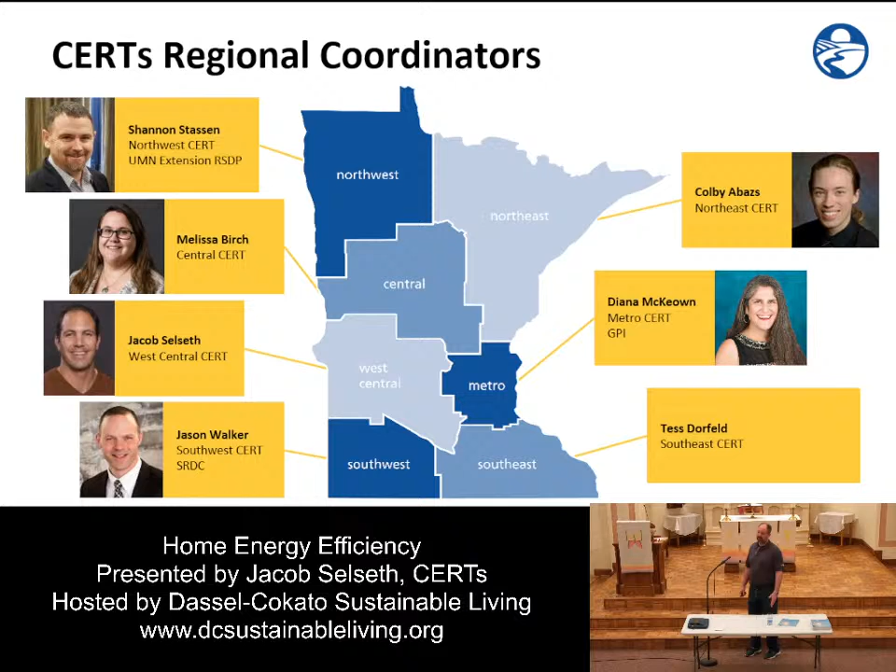All right, so that's enough about CERTs. Any questions about that? Probably not. So now we're going to dig in, get to know your home energy use. Next slide. So we're going to do a little trivia.

I did like this just to set the table. How much energy consumption takes place in homes in Minnesota? So the total energy used in Minnesota, how much do you think is used in homes versus schools and businesses and agriculture? Do you think it's 1/10, a fifth, or 3/4?

All right, next slide. Ding, ding, ding. Yeah, so what that kind of means is, as a collective, that's 20% energy use in the state of Minnesota. You as an individual can save on your own bill and whatnot, and as we can collectively save, there is a lot of opportunity for energy savings residentially. Next slide.

And this is what it looks like. So this is typical energy use in a home, 800 kilowatt hours per month. Back in the 90s when I was starting, it was kind of 7, 8 cents per kilowatt hour. Now we're like 12, 14 cents a kilowatt hour, which if you think, we are, 25, almost 30 years later, so there is, from an inflation perspective, energy is still pretty cheap. But so you're kind of looking at a little over $100 bill for the typical single family residential home.

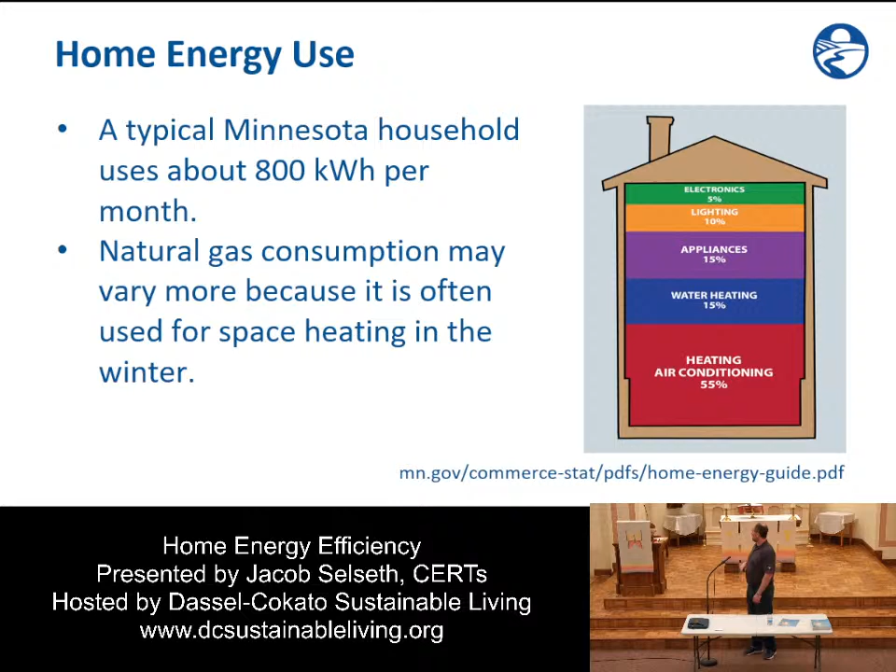The IRA, which just sounds funny to me all the time because I think of other things, but it's the Inflation Reduction Act. That was implemented in the last couple of years, and it's actually being rolled out as we speak. We've all experienced quite a bit of inflation in energy bills, grocery bills, pretty much everything. So this act that's been implemented is really going to help us quite a bit if you want to take advantage of some resources coming available.

So it consists of tax credits. You'll see up ahead here, there'll be some rebates. There's a lot to do with something called electrification and changing our habits of how we use energy.

There's a maximum annual cap of $3,200 a year. What's kind of cool is that a lot of the energy credits out there now are lifetime caps, but this is a $3,200 annual cap, and it's a 10-year program. So depending on how you utilize it, you can stagger your needs. There's up to a 30% tax credit to help you pay for an energy audit, a great place to start so you understand what you might need to do.

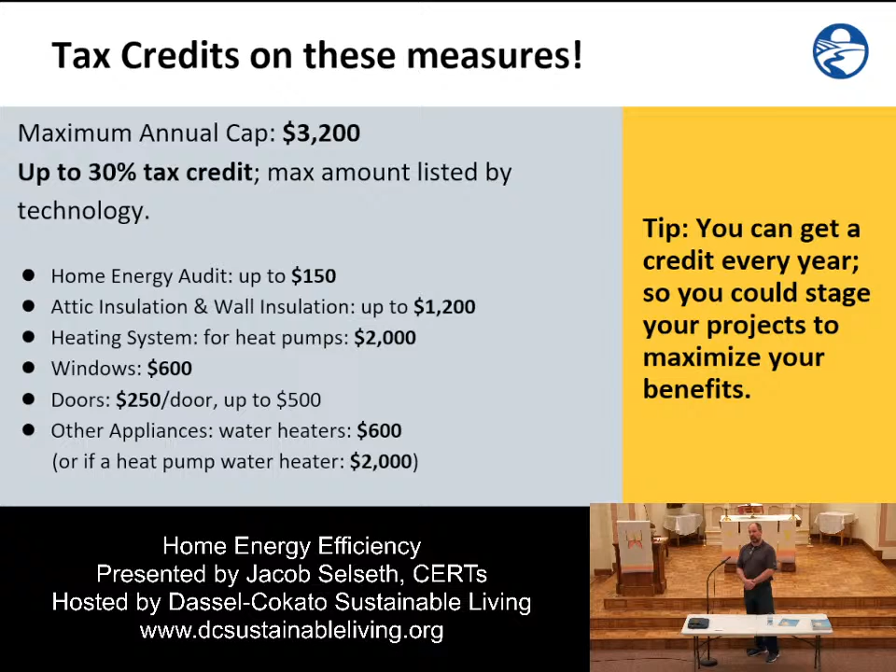Next slide. What is a heat pump water heater? Okay, first let me tell you what a heat pump is. A heat pump — your refrigerator is a heat pump. Your air conditioner is a heat pump. A dehumidifier is actually a heat pump too, but just set up a little differently.

It's the refrigeration cycle. Your air conditioner doesn't make your air cold — it removes heat from your house and rejects it outside. So you've got that little A coil sitting on top of your furnace, assuming you have a forced air furnace, maybe central air conditioning, which is fairly predominant. That coil absorbs heat from your home with the air flowing past it. The refrigeration cycle absorbs that at a quite high rate, and then rejects it outside at that central unit, those larger units you see outside your home.

A heat pump is the exact same system, except it has a reversing valve and is set up where it can change directions. Your air conditioner, your refrigerator, your car's AC can only go in one direction. A heat pump can go in reverse. So it's pretty cool — we talk a lot about air source heat pumps, which are just like your central air conditioner. That big unit is absorbing heat literally down to, and they can run down to 0 degrees, very effectively down to 10 to 15, with incredibly high efficiencies doing that.

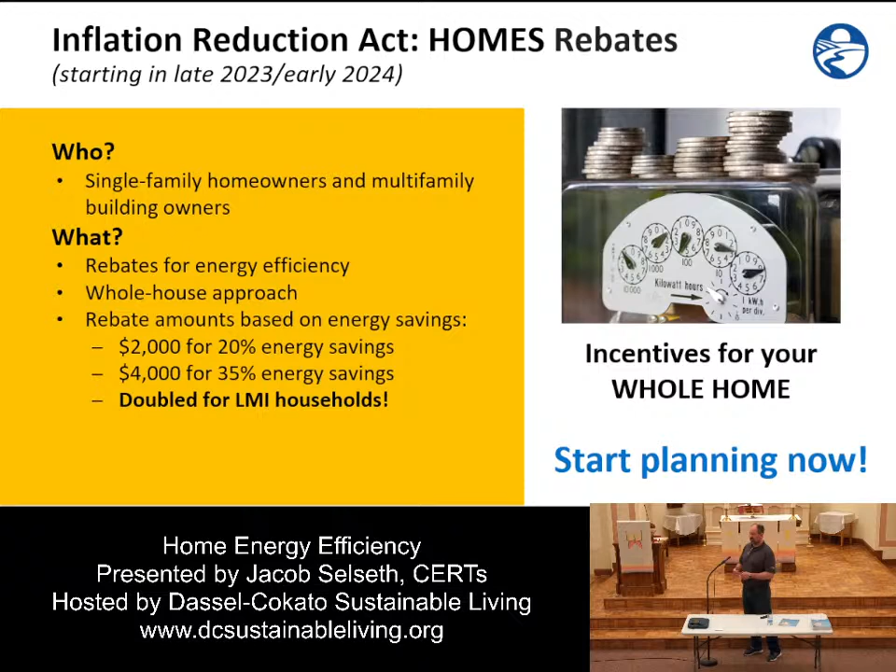So this is kind of nice where they're actually putting it into a rebate form. So if you are of lower income or moderate income, have a family, it's all those kind of things we'll have to figure out. I don't have the details on that. I don't even think the government has it perfect yet. But yeah, it's going to come in rebate form too, so that's kind of nice. And we'll know more as we go.

What's the timing for this? It's basically, it should be now, but that's kind of the way things go. They make the legislation and then they tell people to go figure out how to implement it, and that's kind of where we're at. I actually kicked myself a little - I did a lot of energy work last year knowing this was coming, but I had my own reasons for doing it.

That electric load service upgrade, for people that want to start charging in their garage for an EV, heat pump type things, solar, all those kinds of things - I think you can get up to like $14,000, so I'm just kind of like, wow.

When the housing crashed in '07, '08, they had a Recovery Act then, and a lot of that money went towards utilities and the smart grid. That's kind of like two-way metering. All the wind turbines we see now, a lot of that came because it was heavily incentivized to push, basically, some government money to push that market that way.

Now, when I was at Moorhead Public Service, we figured the energy coming out of that wind turbine was about 16 to 18 cents per kilowatt hour, and Moorhead Public Service's rate was 8 cents a kilowatt hour. Those large wind turbines you see out there now, the average cost coming out of there is 2.2 cents per kilowatt hour. It's cheaper than nuclear, cheaper than coal, cheaper than everything.

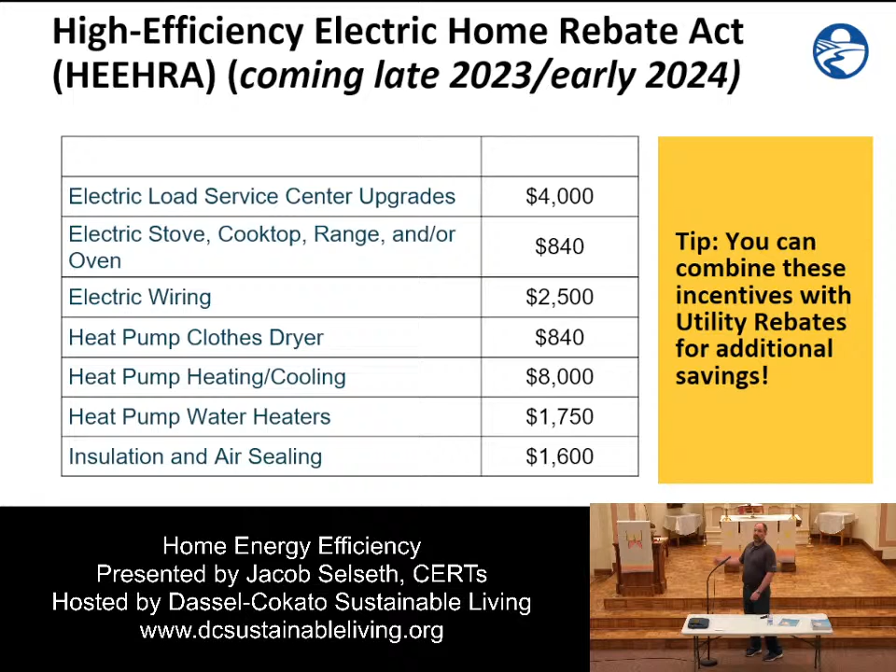So when it's windy for these couple of days, does it store up extra energy because it's extra windy now? Yeah, so I mean, there is kind of that.

It probably has changed. I don't know specifically, but the turbines have gotten so big. It was 150 kW that we did at Moorhead. Then they did a bunch of 225s. Then they went to 1 megawatt, which is 1,000 kilowatts. So it's a lot. Now they're up to 2.5, 3.

I would be safe to say, once you go over 35 miles an hour, some of the turbines start to turn out of the wind. They're like, oh, it's too windy, too gusty. So you do run into, too windy is not good, but they run pretty darn well, and they've done a cool job of gearing them differently now, so you notice they rotate seemingly a little slower. They're gigantic, so they calculate it based on the tip speed of the propeller, the blade.

Storage, essentially? Your question was, if it's windy today, do we have energy from that for tomorrow type of deal? So that would be energy storage, essentially? Yeah, so I didn't take it in that direction, but energy storage is definitely a big piece of the pie right now.

One thing I think is a little bit overlooked is the simple fact that as we diversify those resources, we've got wind now going in South Dakota. We got wind, and this is pretty recent. South Dakota is very recent. North Dakota was just like 10 years ago, and Minnesota was kind of the 15 to 20 mark. So if it's windy here, windy there, there's a marketplace out there that helps dictate where energy goes through something called nodes.

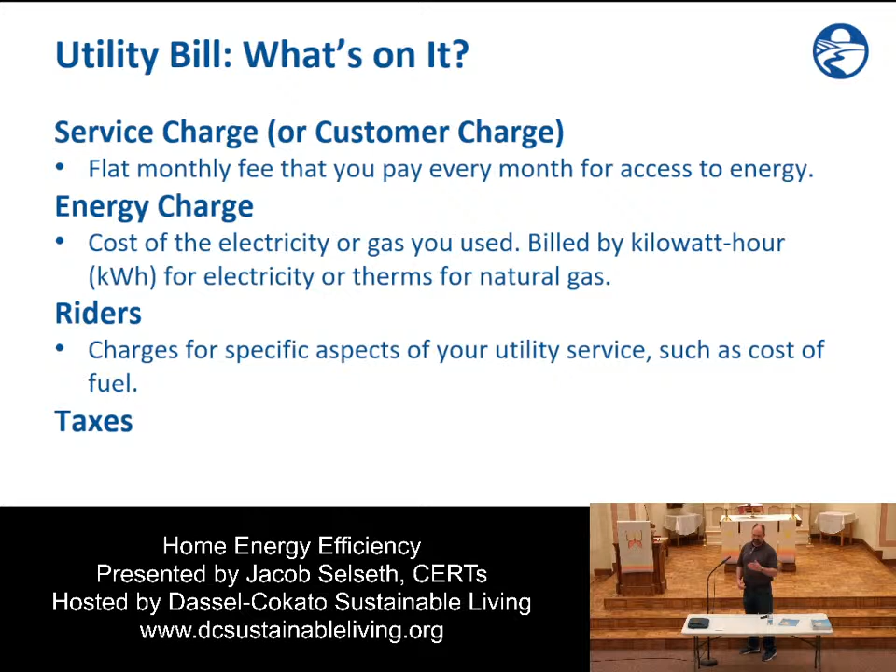And then there's riders. So you'll have like a 12-cent, maybe go next slide too, actually, on this one.

Yeah, there's way too much detail on there. It's too far away, but there's a lot of riders. Like you see this a lot on the gas bill - the natural gas bill has a transportation fee, an environmental fee, there's this fee. So once you add them all up, you could have like 50-cent gas, but really it's 85 cents once it's all done.

And that has been a big one. So during COVID, natural gas was like at 50 cents a therm - that's 100,000 BTUs, I know, whatever - but that's what they were charging, and now we're over $1. So that was a doubling. And there was a time earlier in my career that it went like $1.10 or something like that, but that was kind of an aberration.

So it'll be interesting to see how things shake out. But energy prices are up. Electric is actually kind of nice - it is up, but where gas can go up and down literally on a month-to-month basis, electric sometimes they'll have winter and summer rates, but generally the increases are much more like 2%. Sometimes you hear a little bit more like 5%, but it's much more kind of a stable environment, generally regulated by the Public Utilities Commission.

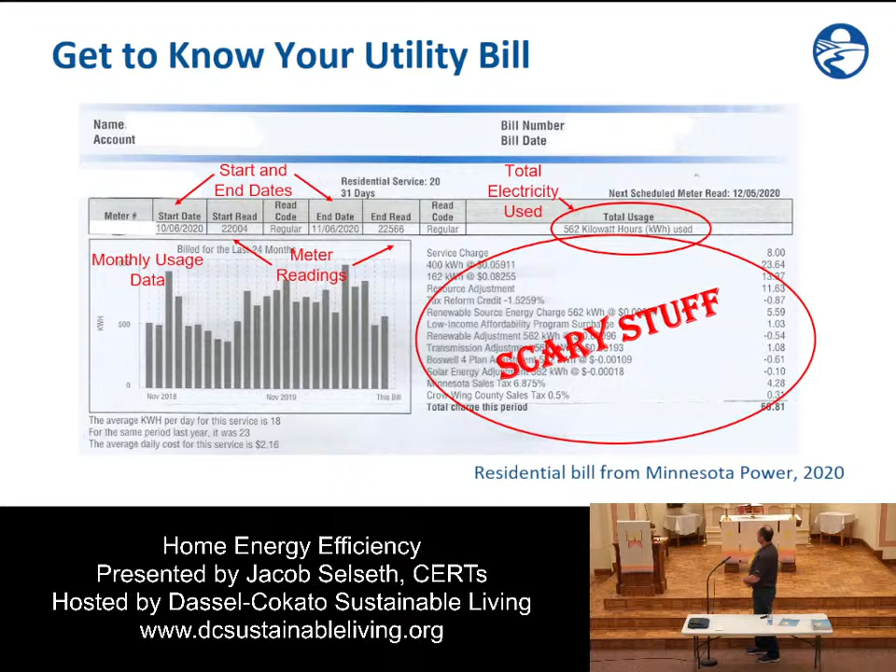Okay, yep, so a kW is the power - that's that 1,000-watt space heater. 1,000 watts, that's how much power you have. You run it for an hour, that's a kilowatt hour, 1,000 watts over 1 hour. That's the 15 cents. So when I started out, I bought a house, rented, put a guy in the basement. He thought it was cold, plugged in the space heater, and that thing just ran and ran and ran. It was like $80 a month. So time - and I'm going to show this, hopefully it's coming up pretty quick - is a huge piece.

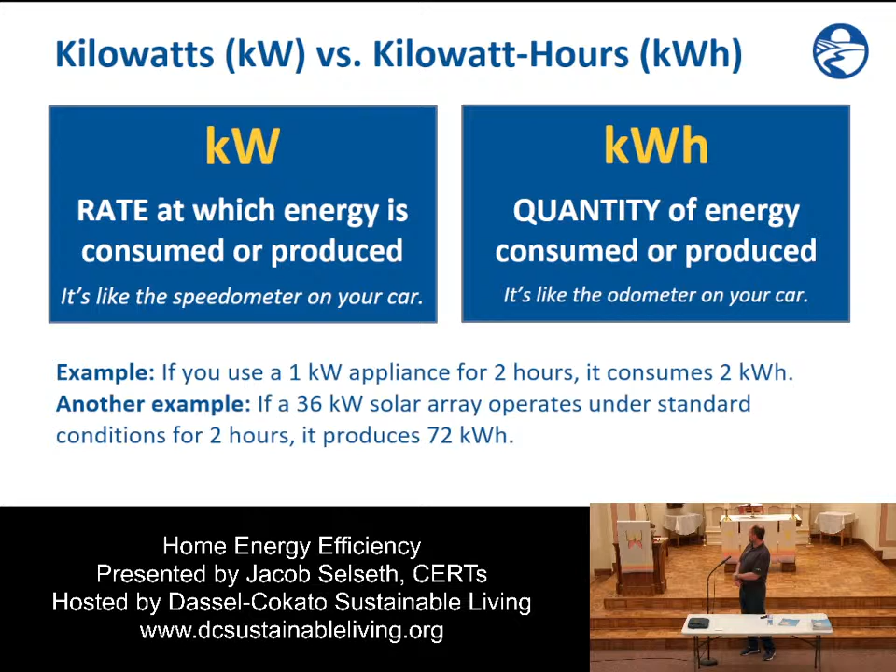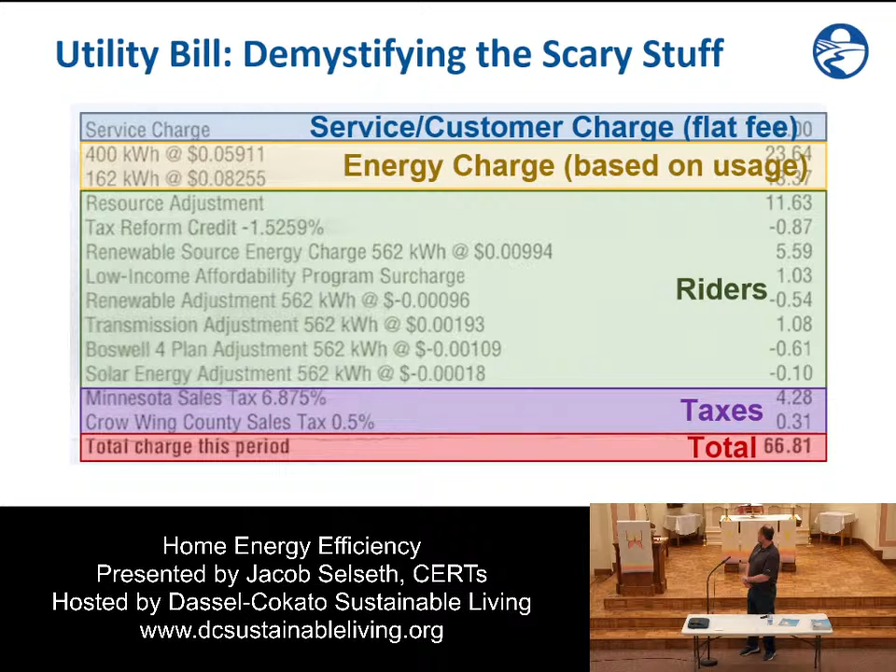My time piece is coming up. So this is kind of nice - almost all the electric utilities now have like a My Meter type program, or they can have a lot of different names for it, like everything these days. But essentially, I mentioned something earlier called smart grid. Meters used to always be just one-way, so it would count your electricity, and a meter person would come along and read that meter, and then they would charge it, and that was it. Then they started to be able to send that number over the wire - sometimes they could do that. Well now meters can talk two ways - they're two-way communication. And to be honest, we have not really done a lot with that.

There's kind of cool things that can be done, but that's still down the pike. But one thing that has been done is you can pretty much go online at the vast majority of utilities. There's probably a few that don't have it, but most do - co-ops, IOUs, I'm not totally sure. Munis that have it, but it's hard to say. There's a lot of utilities in Minnesota.

But you can kind of see these spikes. And if you've taken a lot of high energy bill calls, especially early in the career, you're like, what the heck happened there? Christmas lights used to be a big driver, believe it or not - not so much anymore. The LEDs actually make a big difference - LEDs are huge energy savers. But you see the air conditioning bump there in the middle.

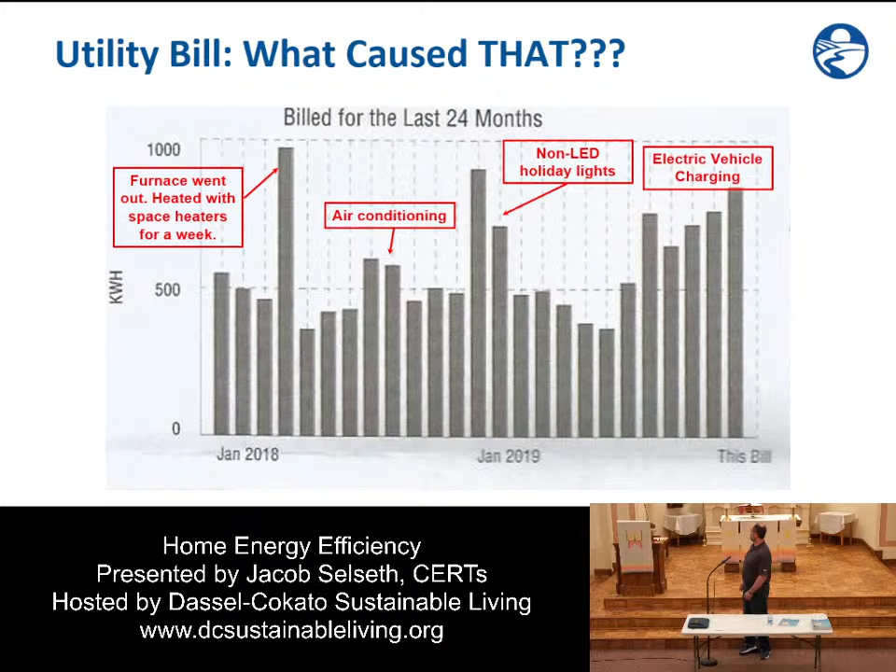For those of you that don't know, yesterday was the final day for the cold weather rule. So May 1st, the cold weather rule ended. That's for folks that have a hard time paying for their utilities—the state of Minnesota won't allow utilities to shut off people's heat in the wintertime, and that's a good thing. But the bills do come due, so on May 1st that program ends.

EAP—you guys know what that stands for? Energy Assistance Program. Let's go to the next slide.

Basically, like I said, cold weather ended yesterday. If you know somebody in that position, the next slide has resources. Right in Wright County, we're kind of right on the edge—in Wright and Meeker.

Wright County Community Action serves a little bit wider area, but they can help you with your bills. Wright County is right here, and then United Cap is over in Meeker and a little bit beyond. Those are people that can help you with a lot of things—energy audits, helping with bill pay, all kinds of things. They're really great organizations, and we work with them a lot. Any questions about that?

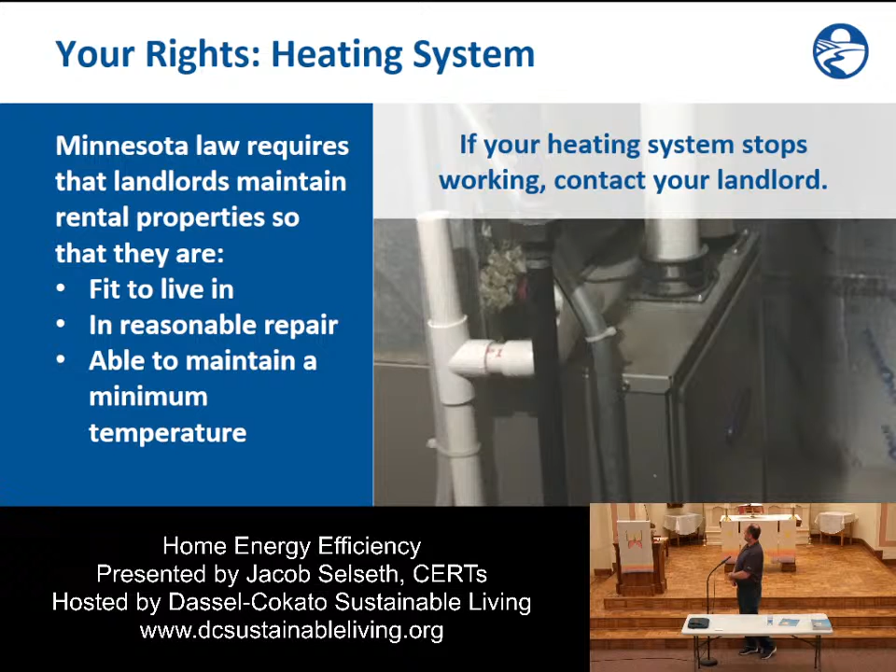Next slide. So check your utilities—they've always got the best rebates, things of that nature.

All right, so now we'll get really into the weeds. Hopefully you guys have some specific questions about your own home, but I'm going to show you a little bit about my house.

I love putting this up here because however you save energy, whether it's gas or electric—this is a little more electric-focused as a representation—you can reduce your power, like getting a refrigerator with a lower kW amount that operates more efficiently, or you can reduce your time, and that's a big one. If you have things running a lot, look there first to try to reduce the time through motion sensors, time clocks, or just simply turning off the lights.

And that's all it is, kilowatt hours—kW times hours is kilowatt hours. Does anybody know what the 8,760 number is? That's how many hours there are in a year. So that is a giant multiplier.

People leave stuff on and it just kind of adds up and adds up. You can talk about a 60-watt light bulb, but if you're leaving things on... big thing, dehumidifiers in the basement, those old brown ones—anybody remember those old black and brown dehumidifiers? Those things just run and run, and people call in and ask why their bill is so high. You go through this checklist and realize you never think of that. So try to find those things you never think of—maybe it's insulation, a hole in the insulation, a leaky window or whatever, that's just a sieve hour after hour.

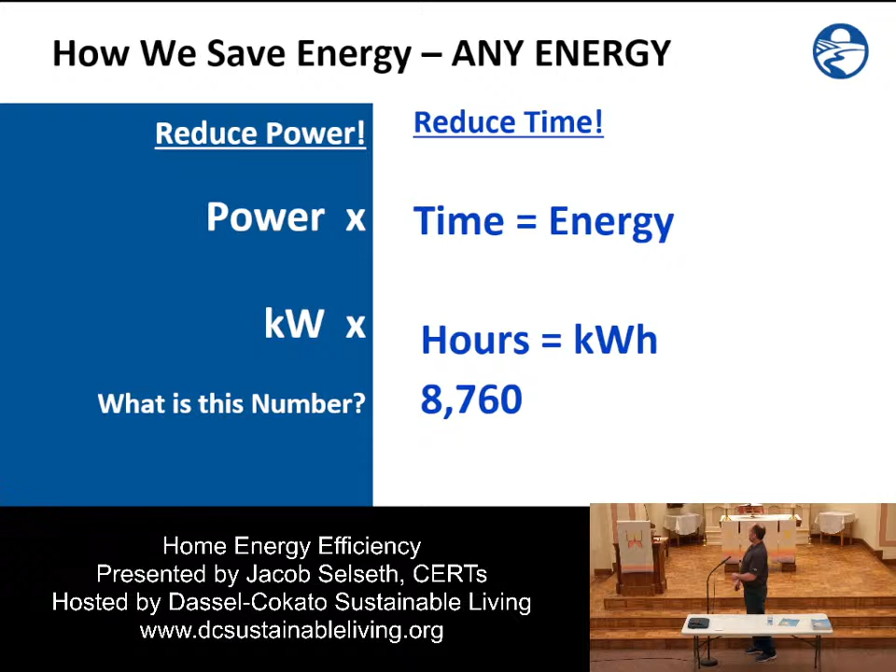We'll go quick, but I think we all know LEDs are the most energy efficient. Are you guys liking the LEDs? So for the most part, maybe? I always remember CFLs, and I still don't mind mine. I like them, but there's been a lot of backlash on those. LEDs have been more popular, I think. This is all LEDs right here. Nice, those are all LEDs.

And you probably had a demand charge here. Did you notice maybe a lower demand with your lighting? Yeah, because that could have been 100, 150 watts, now it's probably 20. And then multiply that by all this. The thing with a church is they don't have regular hours, but these guys unfortunately probably have to pay a demand charge. Is that right, do you know about that? They get kind of a wallop for Sunday since they don't have a lot of hours. But so LEDs are great.

Next slide. So they do it all. They have no mercury - CFLs had a tiny bit of mercury in them. They last forever - CFLs lasted 3,000 hours, LEDs last 20,000 hours. Sometimes I don't feel like they always do, but they're incredibly efficient.

One thing to know about LEDs, a couple things - one thing they never tell you too much about, they don't use a lot of energy, so they don't generate a lot of heat. But the heat they do generate is on the back side in the solid state. They're a solid state component that lights up the LED, light emitting diode, and that gets hot, so it really needs to get cooled. They're all designed to have air moving by them to cool off that little electrical circuit. So they're not really supposed to be in enclosed fixtures - you can put them in there, but it's going to shorten the life significantly. So that's just something to be aware of with LEDs.

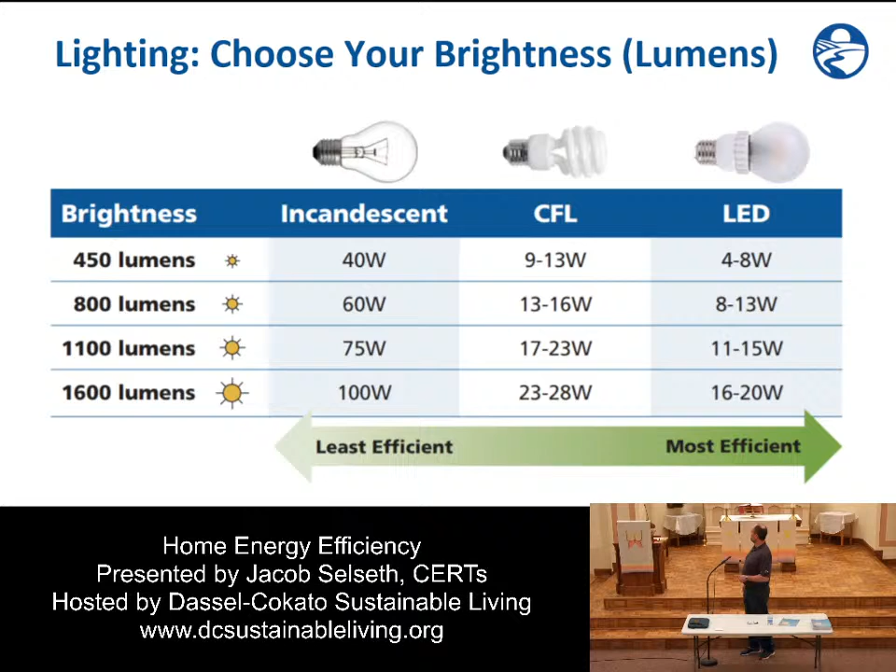Lumens is the amount of light, that's a measurement of light. 800 lumens for a 60-watt incandescent. This CFL was 13 to 16 watts, and now the LED is 8 to 13 watts. So you can see we made a huge jump from incandescent to CFL - the CFLs are good on the energy basis. And now we made another nice jump to the LEDs with some other added benefits for sure. So that's how that looks.

Next slide. This is one piece that I think - the two big things were make sure they can stay cool, because that'll keep the life long. And then this one, I don't know, this is sort of a personal one for me. And it's a personal one for anyone, so my opinion is my opinion.

But that number on the far end, that's 2,700 Kelvin. I don't know, probably not many of us have ever heard of that before in lighting. Show of hands if you knew what 2,700 Kelvin means. A little bit, yeah, exactly. And that's totally fine, none of us should have to ever worry about this. But now when you go into the store and have to pick through all these things, 2,700 Kelvin is the color of your incandescent light bulb. It's a warm color - we're pretty warm in here still, so I feel like you probably have 2,700 Kelvin, you might have 3,000. Do you have any idea? Probably not. Correct. But you could get a lighting vendor in here that puts in 5,000.

And I swear an LED at 5,000, you might as well be 6,500. LED is a white light. It was very hard to develop LED lighting technology - they literally had a contest for millions of dollars to develop the LED incandescent equivalent bulb. It was very hard to do, people much smarter than me did it. But they had to take a very white light and make it - it's very nice in here, this is a perfectly lit church, I would say.

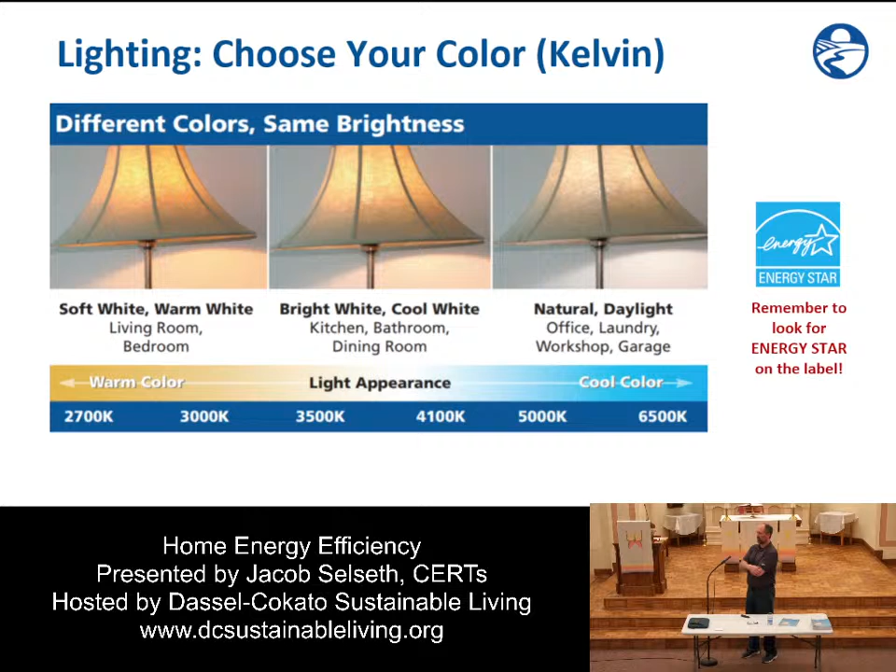Commercially you'll find some variations, but anything you get at the big box store, you should be good to go. So, next slide. We've got a lot of explanation for you with the bright light guide. Next slide.

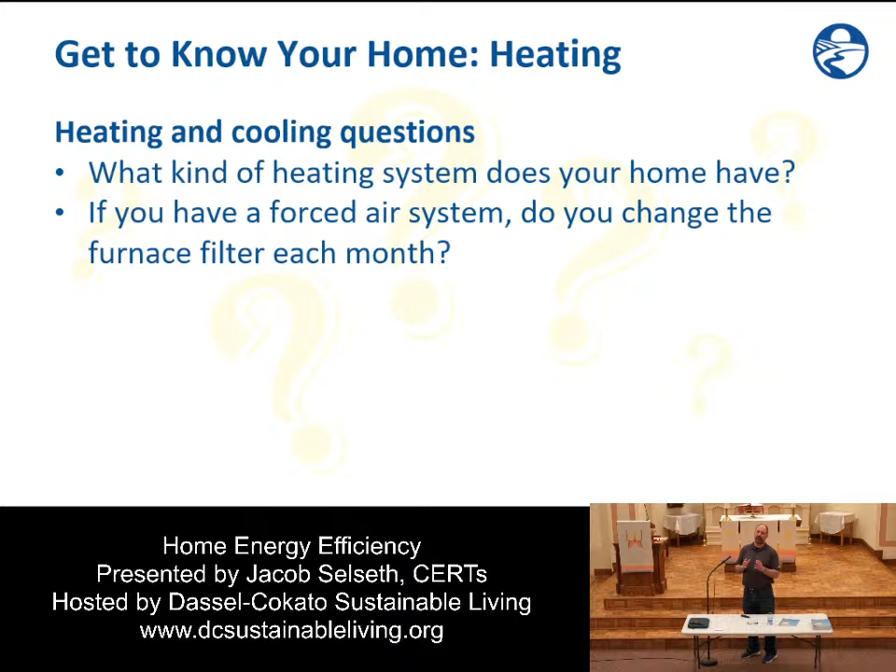The big thing is definitely to get to know your heating system, know how to operate it. Know whether you have a boiler or forced air. Know what you have, and that will kind of put you in the direction of the right opportunities. Next slide.

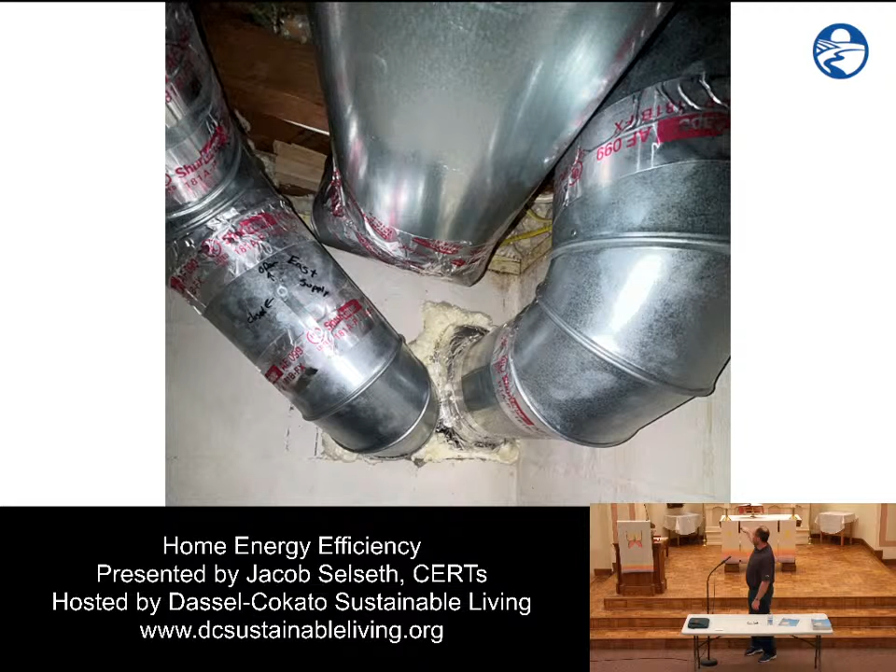I also worked on finding the holes, just to seal things in. I love spray foam insulation -- it's super cheap, those little Great Stuff cans or whatever. That's super easy. Next slide.

Here's a better picture of the damper. So basically, my furnace is right here, it goes up, over, and then there's the damper. I've got that wide open because I'm trying to heat that room, pushing all the air over there. I guess I probably should have taken a picture from the other direction -- I've got it trimmed down.

So you're kind of playing with that stuff. So if anybody had any cold room issues, we could talk about it, but it sounds like we're okay.

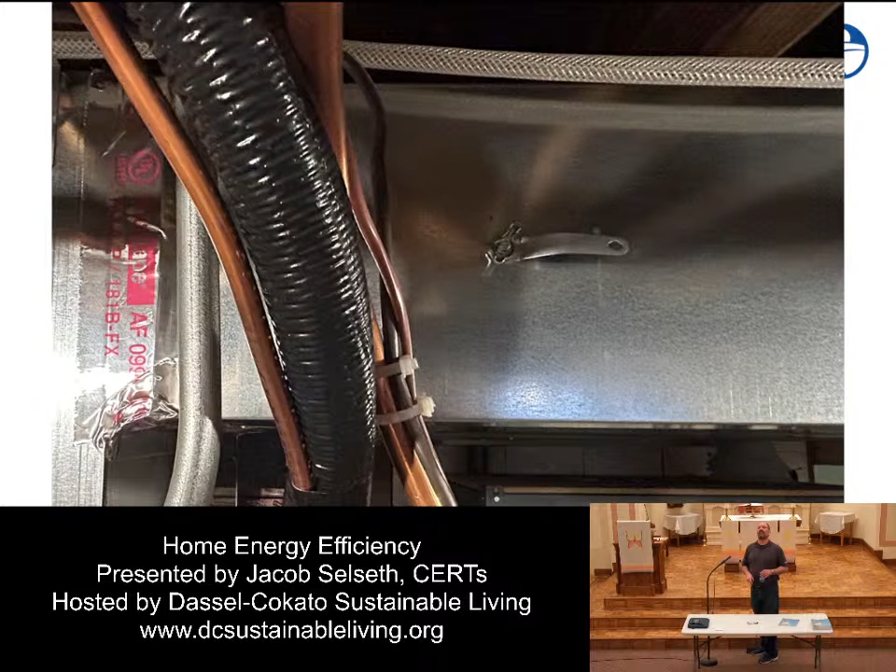Next slide. I have a question. I don't know if you're going to talk about mini splits, but what is a mini split and when would you use it? Yeah, so now you have a boiler, so if you have hot water heat, you don't have ductwork most likely. And so then you're probably using a window air conditioner, and those are fine, but they're clunky and maybe annoying, and they're reasonably efficient but not that great. The mini split systems, and they also have mini split air source heat pumps, are a great alternative to a window unit where you can get more cooling.

They're incredibly high efficient, their efficiencies are absurd. They're like 20 SEER rating. And so they're very good when you don't have ductwork. Some people would even probably get you with ductwork, but I would never. It's better to have, it's nice to have. If you got ductwork, use your ductwork. So not everybody's going to tell you that, but it's the way to go.

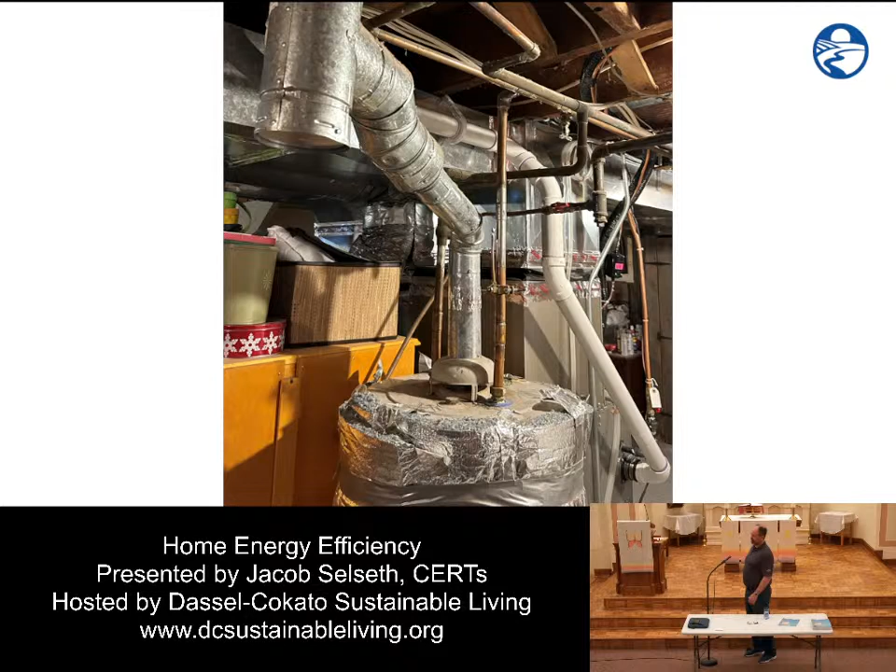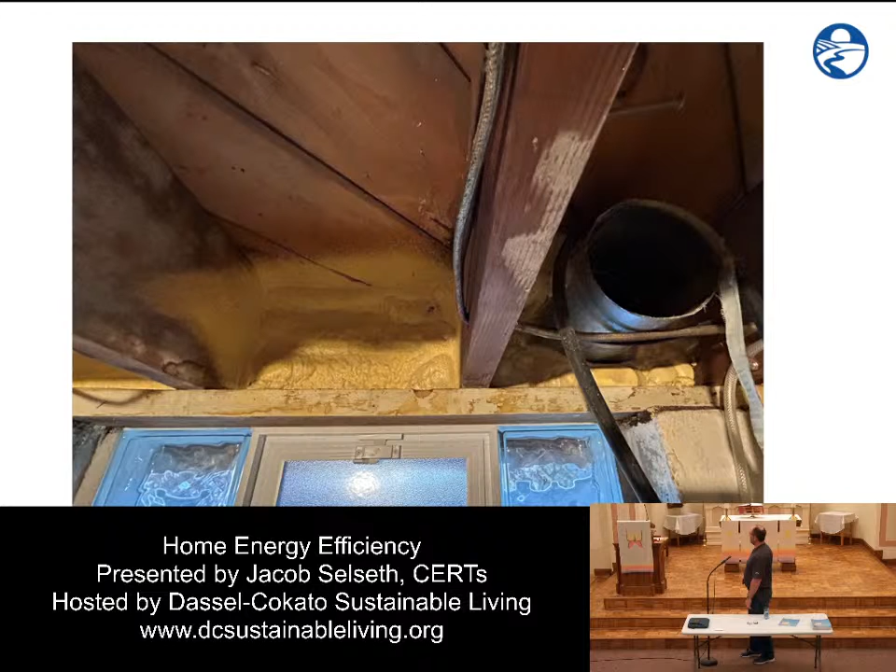So anybody on Xcel Energy and CenterPoint Energy, run out and get the home energy squad to your house. I brought them into my house because I'm an energy nerd, and I wanted to see how good they were. I wanted to see if they did a good job. They did a really good job.

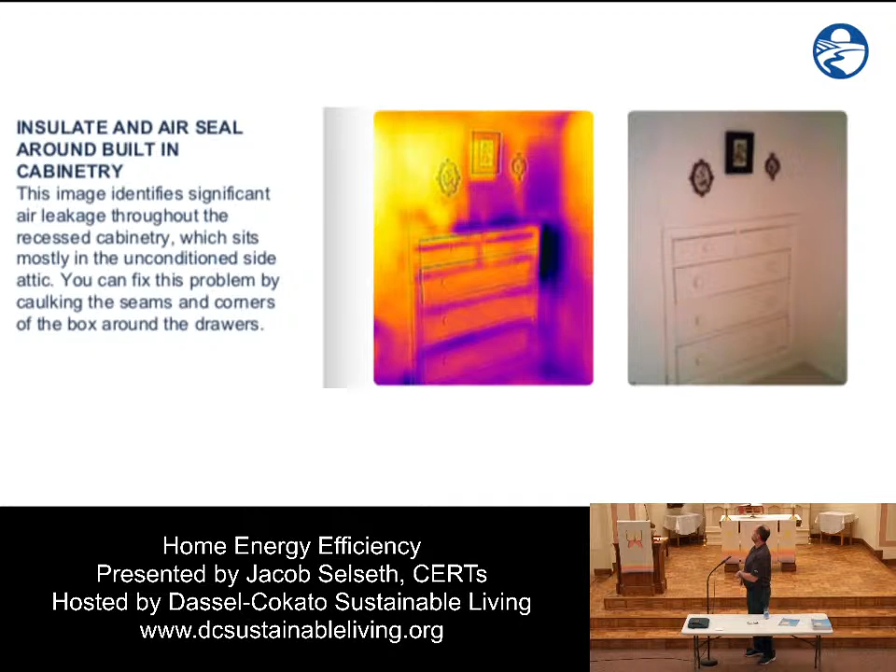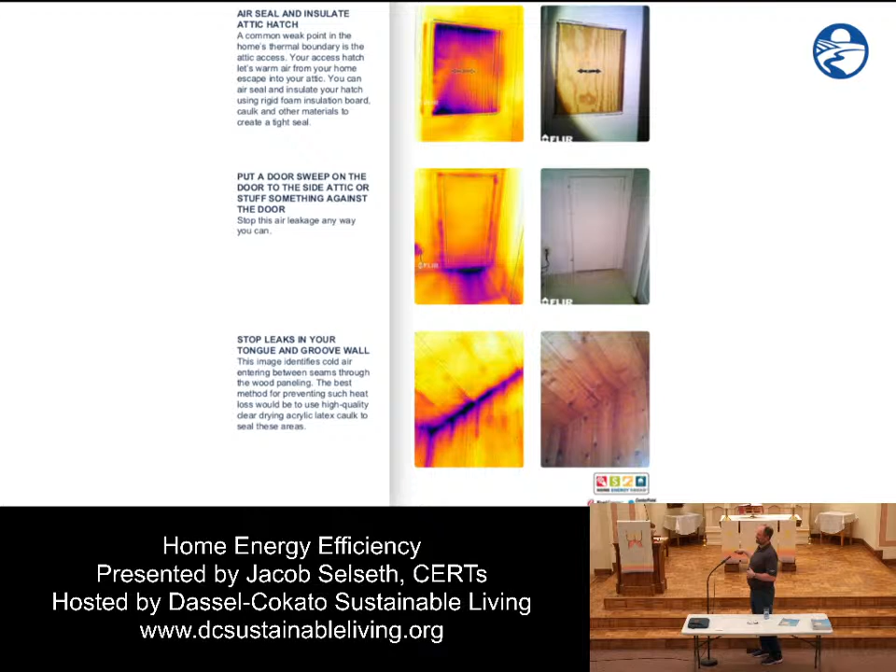Same thing, so I actually got rid of some cedar for my wife. There's a fireplace right here. She wanted to brighten up the place, so I got rid of this whole beam - this is me, kind of Mr. Fix-It. Pulled all that off, spray foamed the heck out behind here. I couldn't believe there was a mouse hole like this. I was horrified, sorry, I admit it. But now it's gone, and life is so much better. I won't get into it.

But anyway, so this is Home Energy Squad. This cost me like $80, so it was just like, that's the best thing. I've done these actually before, but I don't have the tools now, and like I said, I wanted to see how good they were. They did a great job.

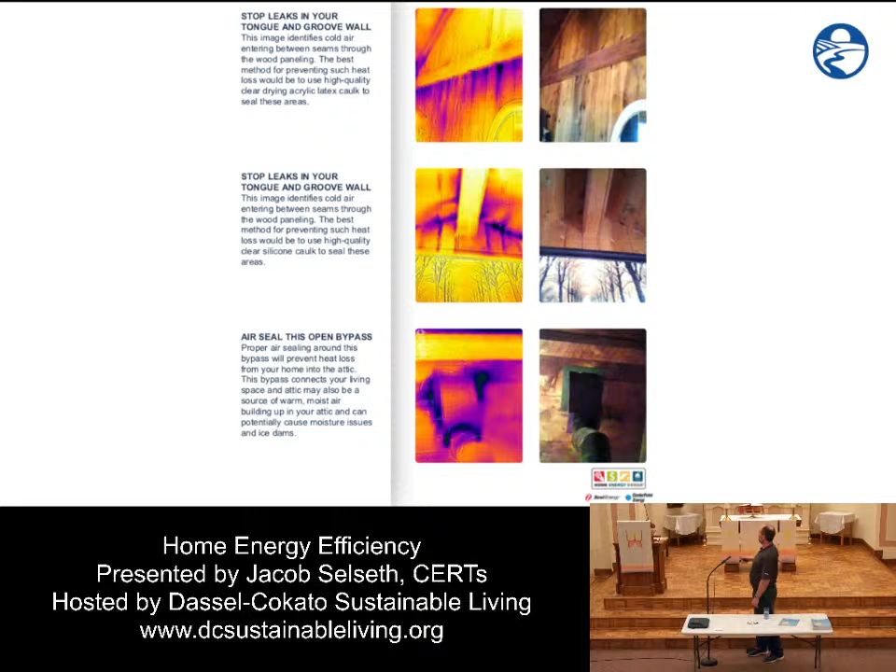This is the chimney. Next slide. There's Ajax, there's our dog. Infrared works on everything. I don't know if he's a very nice dog, he kind of looks devilish there with those eyes. But that's Ajax. So next slide.

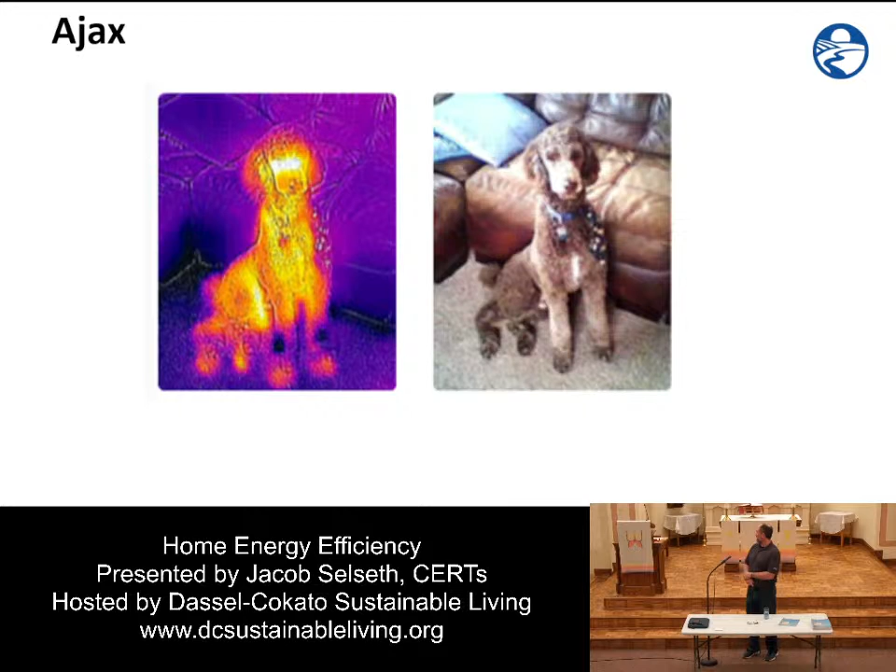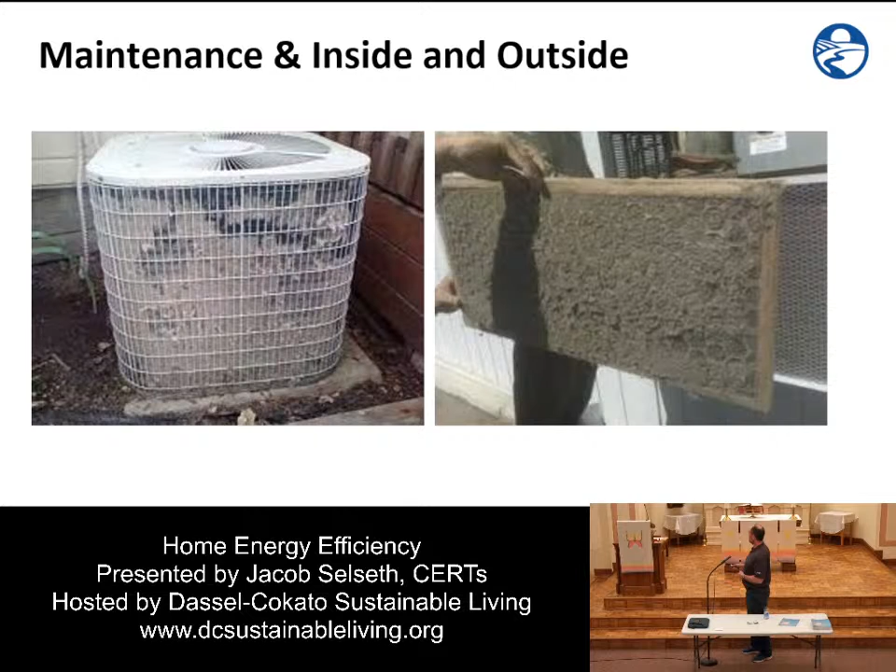Next slide, can we talk about those furnace filters? Sure. I hear controversy on just buy the cheap ones, but change them often, and don't worry about getting the expensive ones. Any thoughts?

I'm mostly on board except for the cheap ones. I'm not real big into washable filters, only because, personal preference, I feel like too much debris can get through. They're all on a micron basis, I'm not super well versed in that, but you can tell with those washables, they allow the most amount of particle through. So I like to get the lowest cost pleated filter.

I did get a new furnace this year because my other one was 30 years old, and we needed to do some of that distribution stuff. I was in that room when we bought the house, we went sweater and a blanket, it was like, oh my God. And then I re-insulated a wall, did some stuff. We went to sweater, and now we're just normal. You just have to take it one step at a time.

But yeah, pleated filter, I would go pleated and low cost pleated, unless you have allergies, then do whatever you got to do. When you buy the pleated filters, they come with numbers on them, anywhere from 8 up to 15.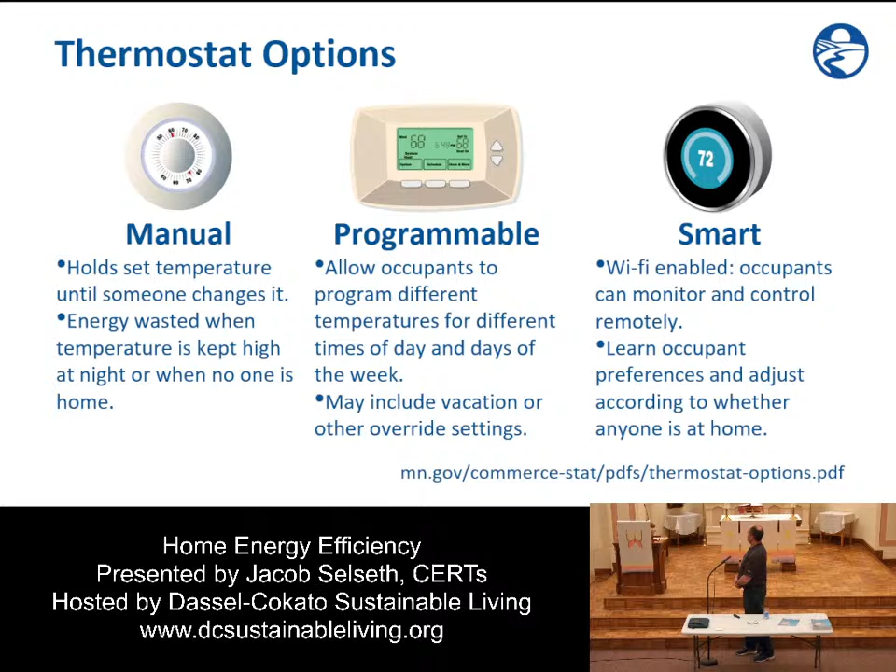Same kind of thing - that 1%, 1 degree, save 10%. The thermostat, that's the big one. Clean those furnace filters, a big one. Furnace fan running all the time, big one.

My mother-in-law loves the window curtain thing. I'm really bad at that, but it is a thing.

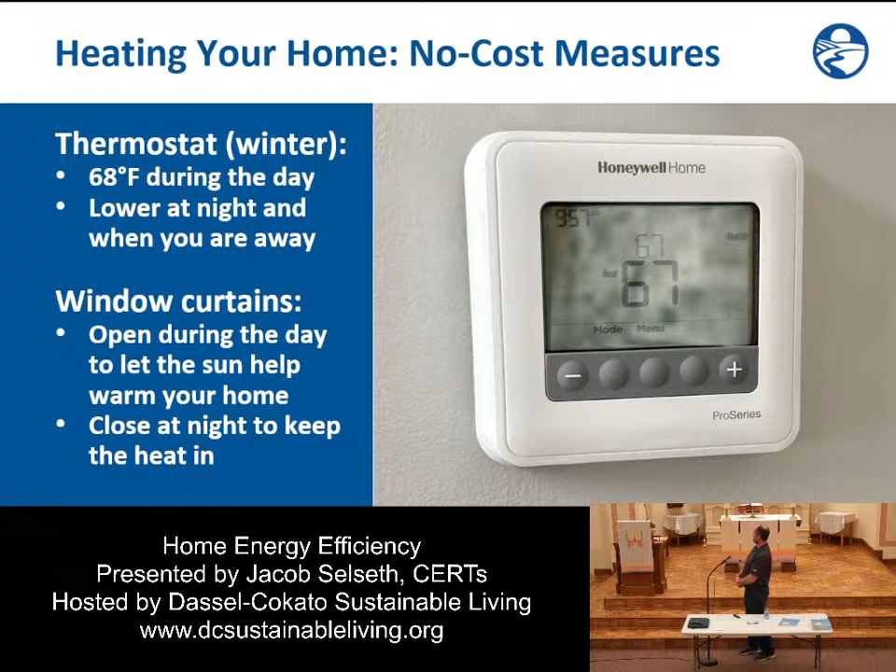I really bragged up spray foam, love it. That little draft snake, that's kind of like a heavy towel you can put at the door. Same thing as a sweep, but it's something you can move around. The plastic is also huge.

Real quick on windows: sometimes you do need windows, but really never will you need windows to save energy, unless they're in real bad shape, single pane, lots of leaks, stuff like that. Windows are pretty expensive, so there's very few times you're going to save on that.

The plastic or a wood storm window, if you need to reglaze or weather strip, do that - they perform very well. An old single pane window with a wood storm sealed up nice, nothing fancy, is about 2.5 R value. That's not high, but if you go buy brand new, very nice windows, you'll go to like 3.5. Your wall is likely 12 at a minimum, and 18 more than likely.

So the energy savings potential is limited. What's funny is they rate windows in U value, which to me is a little more confusing than R value - it's not so additive. Do you know what U value is? It's 1 divided by R, that's just what it is.

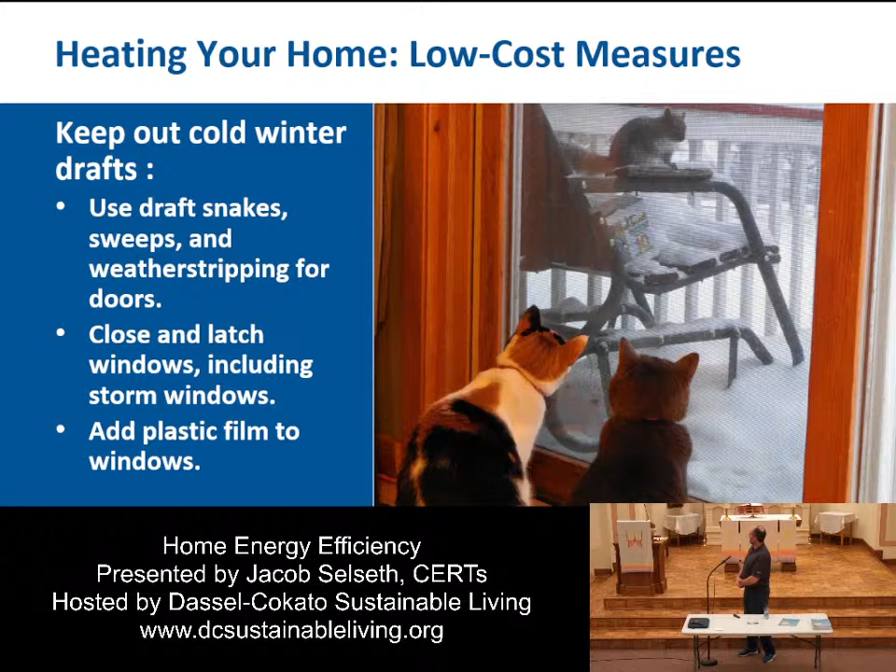So, I don't know, is this on the internet?

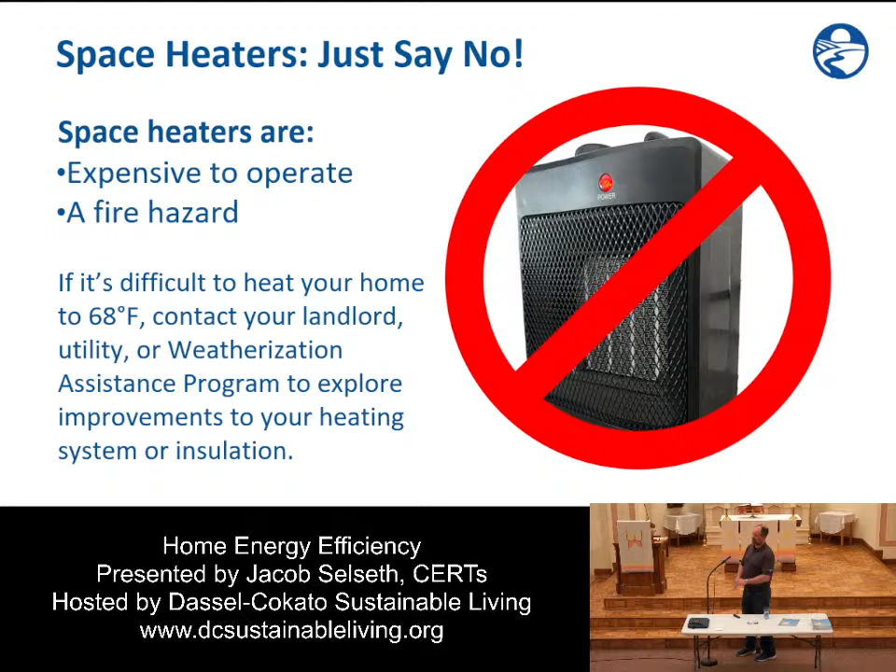Space heaters, I think I've talked enough about those. They're nice if you got a cold spot, you're watching a movie or whatever, that's fine - turn it off when you're done. Paul Harvey did not do a good job selling... well, he did a great job selling space heaters, but they are an expensive way to heat your home. Just a nice little spot in the area for a short time.

Energy Star - go get Energy Star.

So I think some of these aren't as exciting. I've talked for an hour, I don't know how you guys are doing. I'm fine, I'm happy to keep going. This is about air conditioning.

I got a new air conditioner this year. Kind of did want to go heat pump, kicking myself a little, but I had distribution issues. There were bigger fish to fry, and the guy who would do all the work I wanted wasn't into heat pumps, so I didn't do it. But what are you gonna do?

My old air conditioner was an 8 SEER, and the new one is a 16 - incredibly more efficient. It's whisper quiet, they just started it up the other day, spring startup kind of deal. So that's kind of your minimum efficiency now - anything you get new is very good. Really the thought will be, do I want a heat pump moving forward? I got a little ahead of myself, but what are you going to do. And I'm on a co-op too, so I can get a rate.

Any questions about air conditioners? This is a little bit about windows - there's the mini splits, again refrigeration. The mini splits are incredibly efficient, go 20 SEER and higher, and it's a no-brainer because there's almost no cost differential to get a heat pump one.

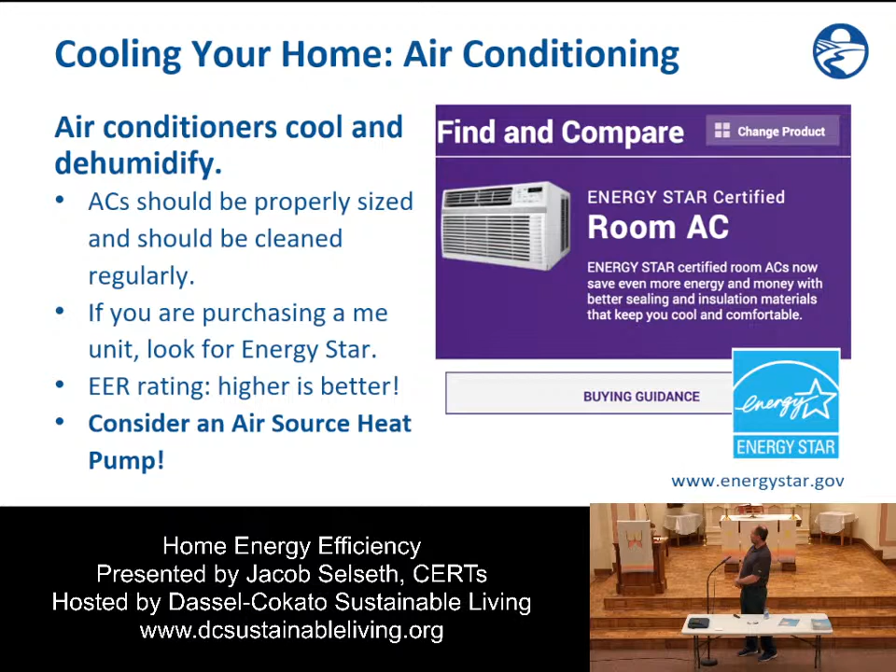Then the ceiling fan - ceiling fan's using like 20 watts. So if you're feeling good with a little cool breeze, it's a lot better than your 2,000 watt central air conditioner. A central air conditioner, a 2-ton, 12 SEER, is 2,000 watts. A fan is 20-30 watts, miscellaneous, not a lot of watts. A lot of people like to sleep with the fan noise too - it's a great way of evaporative cooling, saves a bunch.

I didn't run my air conditioner a lot. Now that I got this high efficiency one, I wonder what I'll do. We'll see, first year.

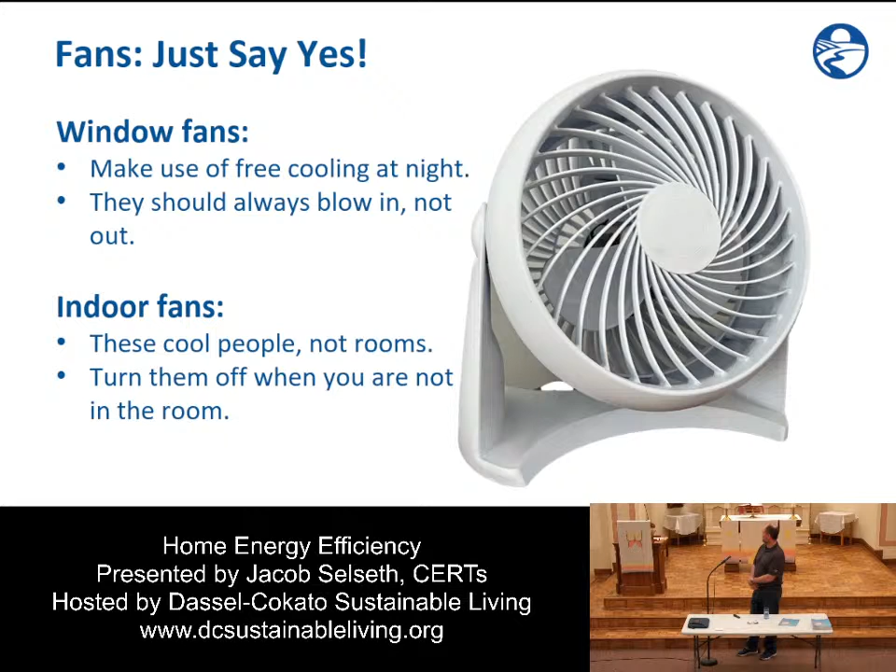I talked to you already about air sealing - this is a great little example. If you are wanting, this is an awesome book - the Department of Commerce Home Energy Guide. It does the best job of showing every scenario you could have in your house and how to insulate it.

It's somewhat important because we have a pretty strong energy code in Minnesota, and when you get a really tight house, you start to deal with moisture. This guide will tell you exactly how to do it to prevent moisture issues. You think we're not warm enough, but this was full of ice out on the patio - you would have water here. That's what happens in your house when you don't apply insulation with vapor barrier correctly.

Are you familiar with hemp wool, or have you worked with anybody with hemp wool? I've definitely heard of it, I'm familiar, but I don't know what the R value is. I don't know, it's measured differently, and it does not hold onto moisture. Now, wool socks are very good at moisture wicking. I don't know enough about hemp, but merino wool does a great job of that, so I kind of think that maybe they're onto something.

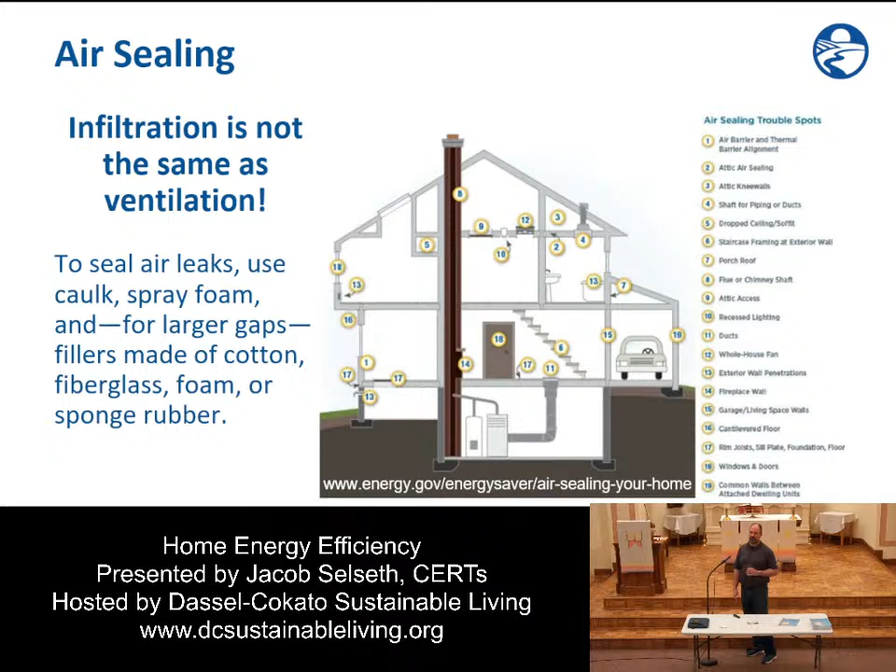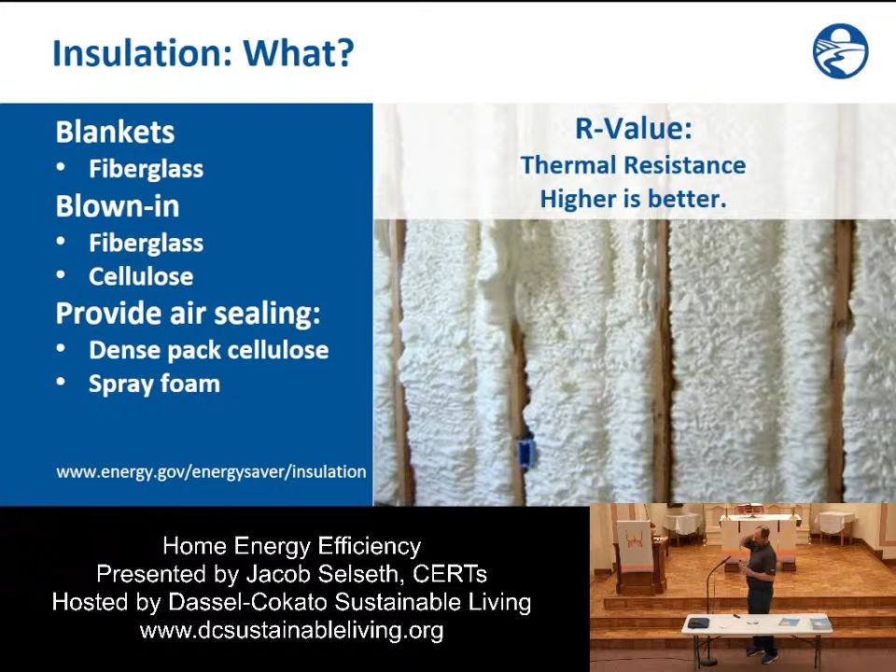Lots of insulation, blown-in cellulose, awesome. Eliminate the leaks, that's what I like about it. It helps close up those air gaps. Next slide. So very good insulation, and this isn't even a knock, I shouldn't knock it, but there's just all those opportunities for leaks, and that's just me talking. Insulators are very good, you get a good contractor that puts up the plastic vapor barrier, all the tape, good stuff. So it's absolutely good, and usually a little cheaper, and should be just fine. Next slide.

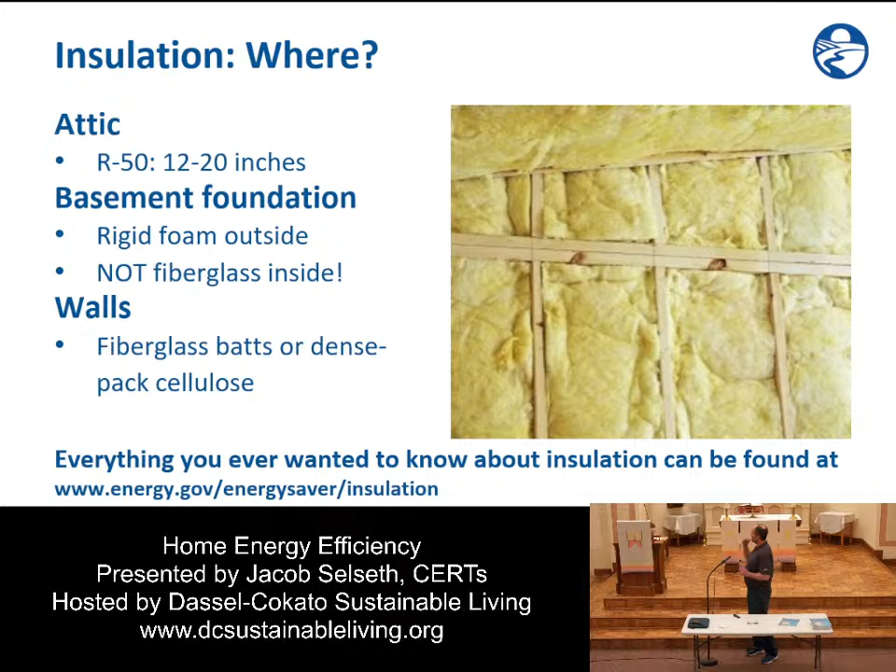Windows, I already talked about that, any more questions about windows? Just keep the windows you have working as well as possible, and when you really need those new windows, go get them, but don't think you're going to save your bill. What you hear on TV probably isn't going to happen.

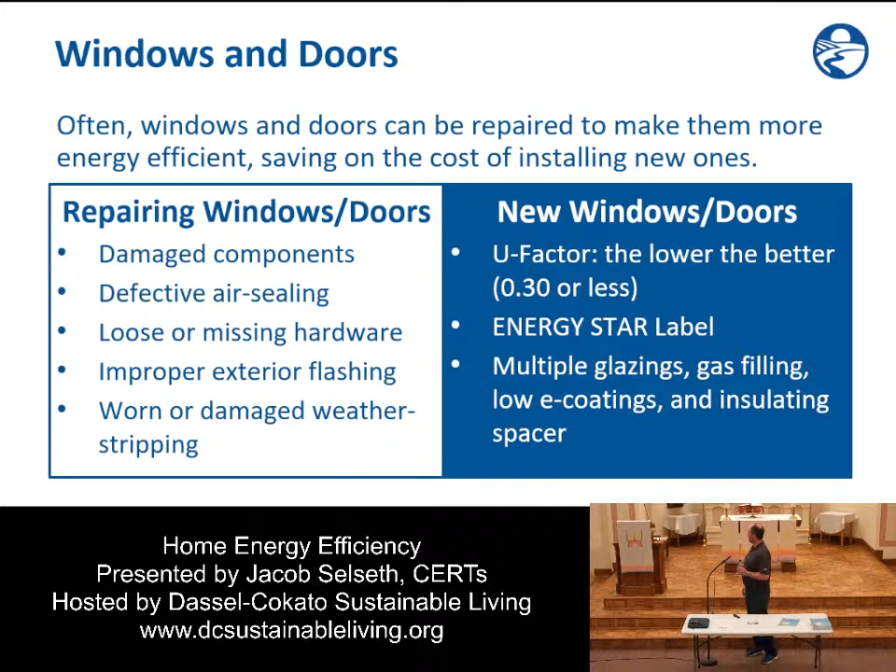And there's that U factor, which is normal, but I just kind of think when I'm trying to help people understand, it's just kind of little things, right? Next slide, there's those heat pumps.

So again, last little thing on the heat pump. I went from an 80% furnace - I use this much gas, burn it in the furnace, now I have this much heat out of there. I only get 80% of the heat that was in that gas because I'm using the heat that's embedded in the fuel. If you have an electric resistance heater, like your electric oven, electric space heater, a plenum heater, it's just electrons getting that element hot. That's all that is, and it does it really efficiently, but only 1-to-1, essentially 99% efficient.

Once you take that heat pump, this outdoor unit absorbs heat, and it does it all the way down to zero. It does it at 20 degrees. You're getting 2-3 times more heat energy than the electrical energy you put in, and it just brings it into your house. So all of a sudden it's the only technology you can sort of flip on its head. Normally you're only getting the heat out of the fuel itself. With a heat pump, you're just transferring heat from outside to inside, and your air conditioner does the same thing from inside to out.

So if anybody tells you it's like, oh, advanced technology, it's crazy, it doesn't work in Minnesota, all those kind of things - it does. And historically, ground source heat pumps - has anybody heard of ground source heat pumps? All that is, we're using an air source, just pulling air by here. Ground source just uses coils into the ground, different ways to do it, sized appropriately. An air source heat pump will take care of probably 60% of your heat here in Minnesota, maybe a little more if you're lucky, maybe a little less, depending.

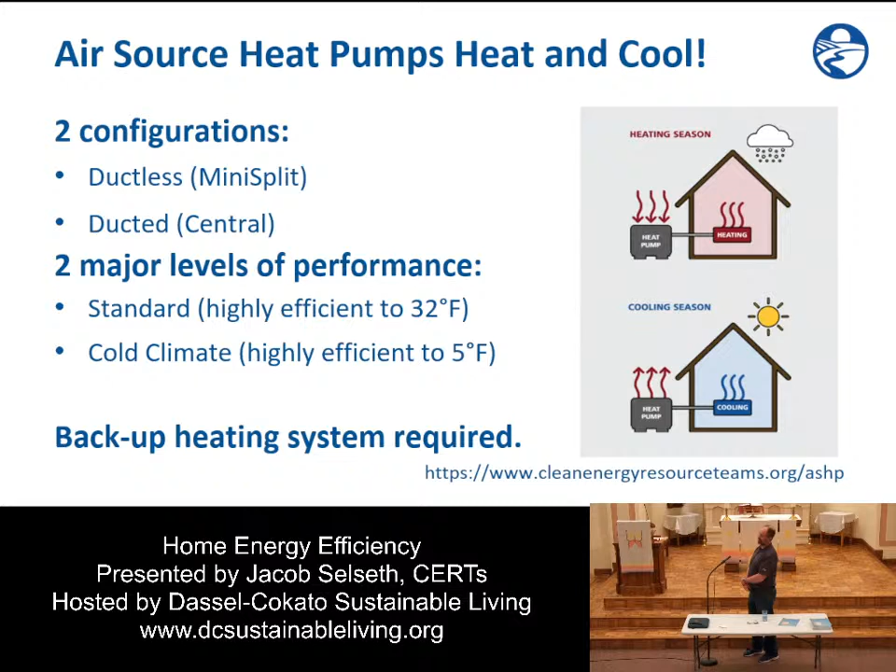But think about it, all of a sudden you get twice as much heat out as the energy in, double or triple. Pretty cool. It's actually really cool for pools too, because now you're using a heater on a 60-degree day, and they pull tons of heat out of 60-degree air. They can still pull heat out of 20-degree air, so imagine what they do at 60.

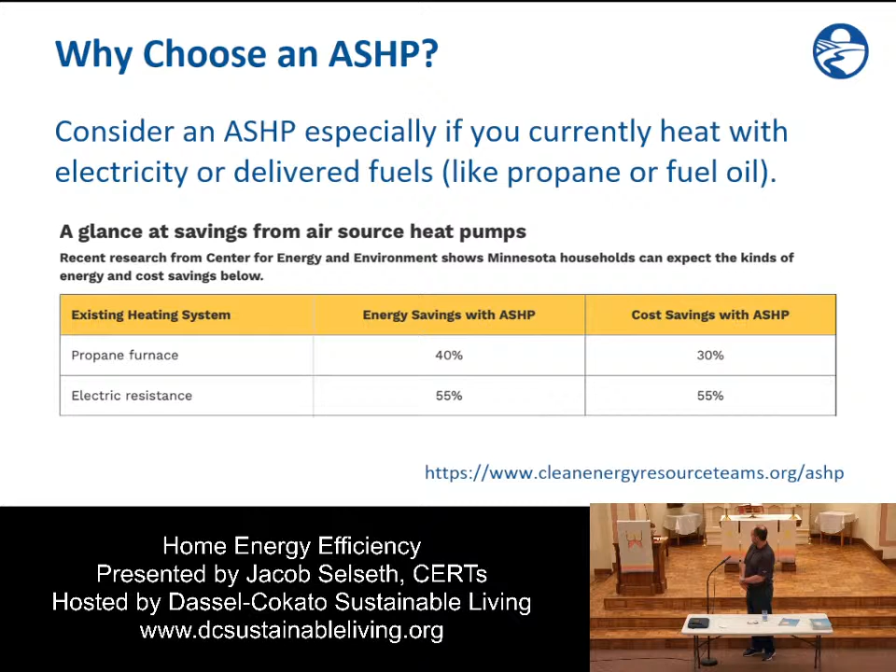Water—one thing I'd say real quick about water. If you have a 2.5 gallon shower head and go down to 1.5 gallon, and you've got teenagers, that little savings of water, saving 5 to 10 gallons every single shower, has a lot of embedded heat energy in that water. The calculation is you take 100-degree water at 47 going in, and you have to raise all that temperature—there's a ton of energy savings there, plus water savings. I mean, why not save water, right? There's so much energy involved. You can save way more on your water heater cost with a shower head than with faucet aerators, and I like it a bit more, because sometimes you need to fill the sink and those different things. But the shower head is a big one.

1.5 gallon shower heads work great. 1.8, you'd never know the difference. Niagara is a really common brand, but they're out there. 2.5 is the standard, and 3.5 is the old one that someone held on to and didn't want to get rid of. So there's a lot of savings there for water.

And then, run the spin cycle twice on your washer to get rid of the water before you put it in the dryer, especially when doing sheets and stuff like that—get rid of that water. Do you use the spin cycle twice? Yeah, get rid of that extra water, because that's a lot. There's so much energy in water, way more than in air. That's actually a pretty new trick that I learned.

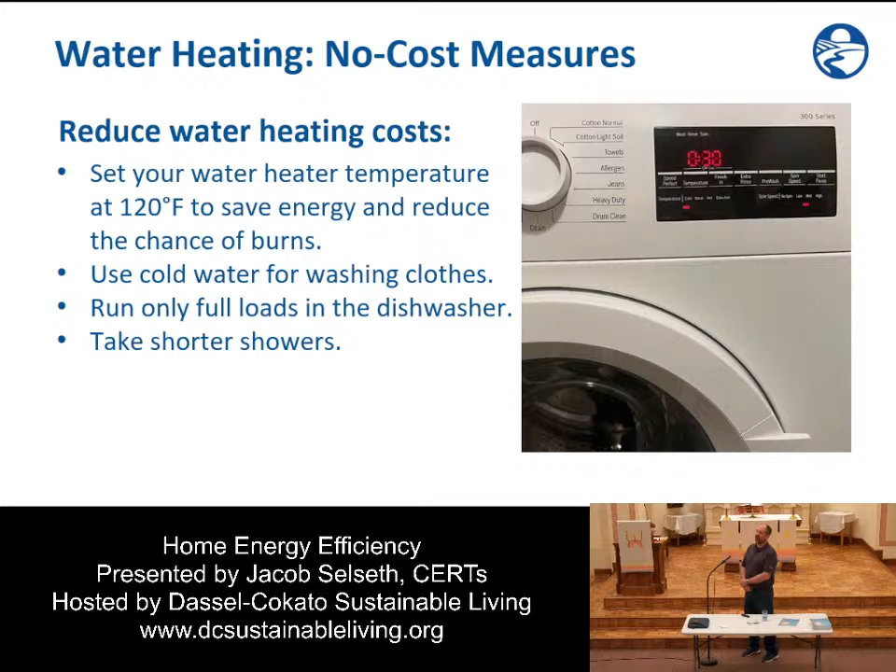I know people like what they like sometimes. That's what's going to happen. And there's just more on shower heads. Next slide—solar. Next slide. Anybody want... I mean, there's a lot to do on solar.

Tonight was about energy efficiency. Solar is very available, has gotten a lot cheaper, with good financing. The state of Minnesota has a 1.5% requirement, and that's why we're seeing so much out on the market. So Xcel Energy has a lot of solar to put out there, so there are good opportunities, and you can talk to us about that if you have questions. If you have any quick ones, happy to take them.

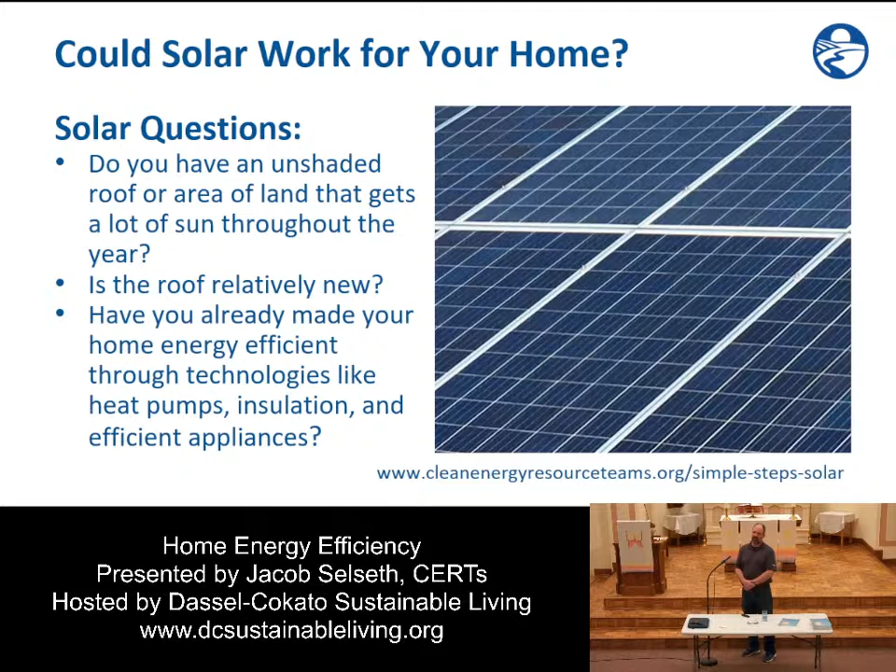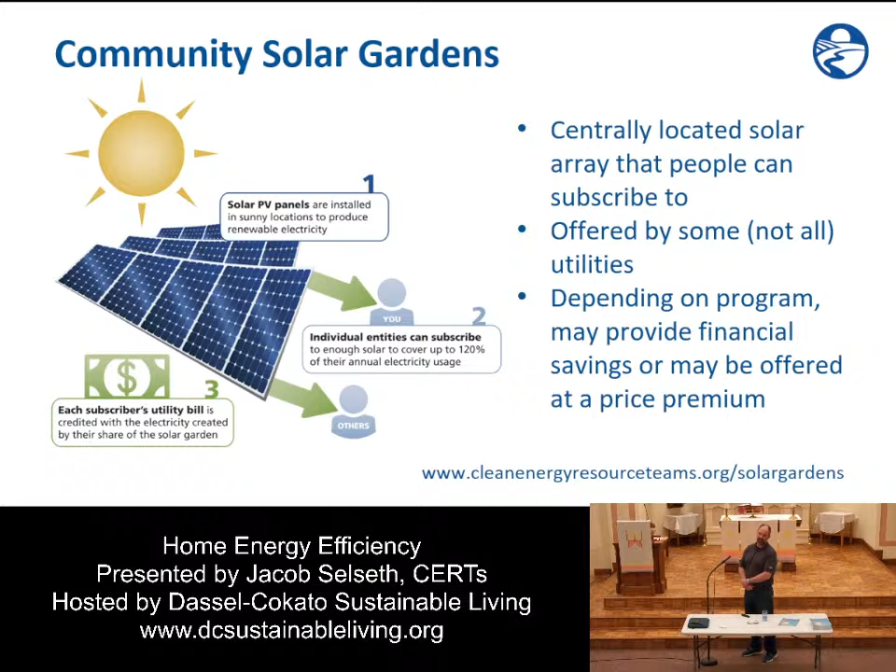Next slide, which I think is another solar one. Yep, community solar—easier than putting it on your house. A lot of the co-ops have community solar, where you can buy into it and get the value of solar without putting it on your house. There are a lot of those out there. Next slide.